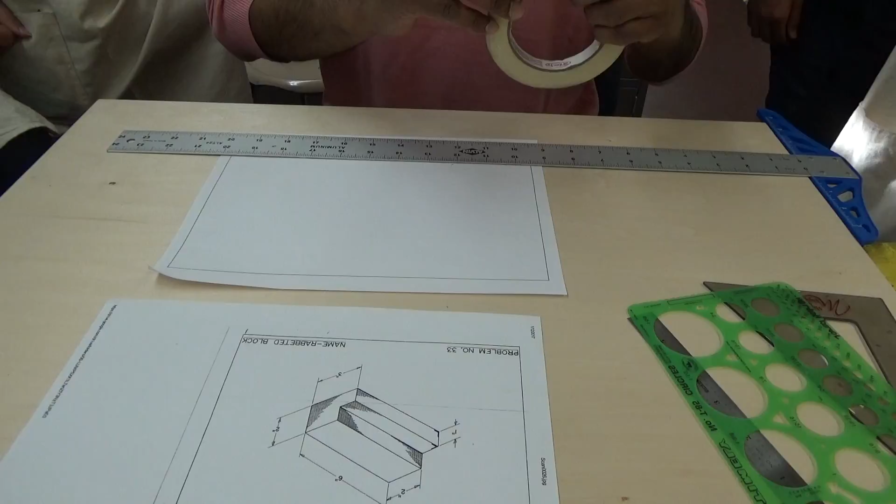Okay, so we're going to do an orthographic projection of this image right here. So we're going to do the top view, the left view, and the front view. So we're calling this the top view, we're calling this the left view, and we're calling this the front view.

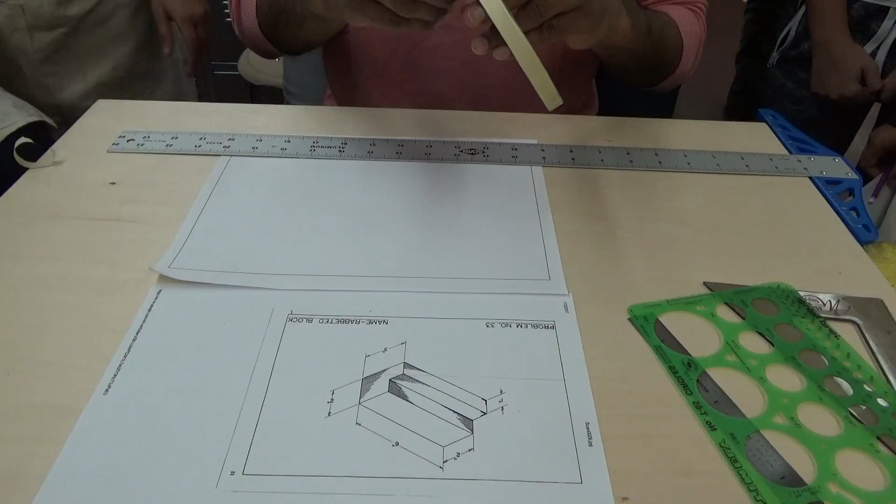So first thing I'm going to do is I'm going to square my drawing paper onto my drawing board. Get a couple pieces of tape. Okay. Break 4 pieces off. Okay, so I'm going to use my T-square to make my edge parallel. Clean off my working area.

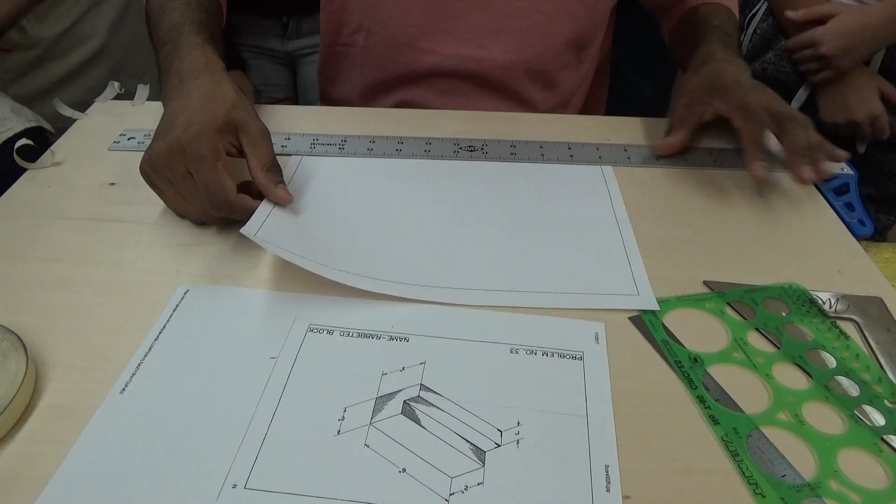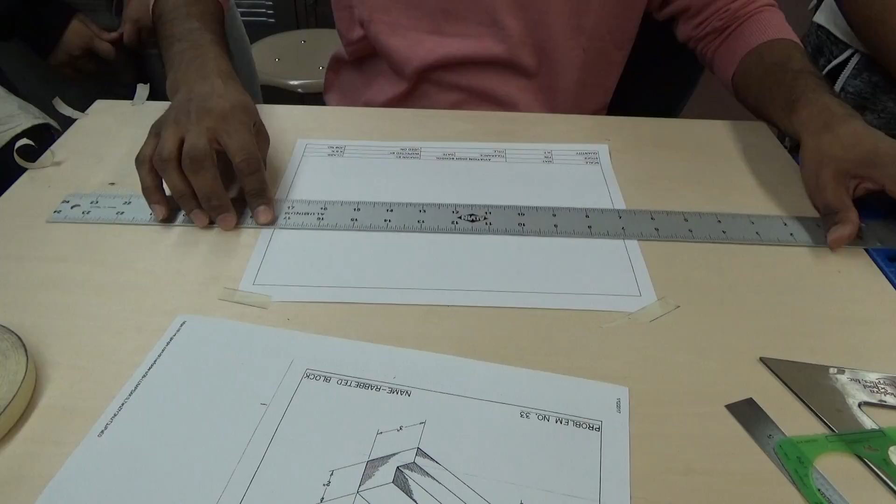Secure the top corners. Then I'm going to take my T-square and I'm going to remove all the air. And I'm going to double check and make sure that my line is still parallel with my T-square.

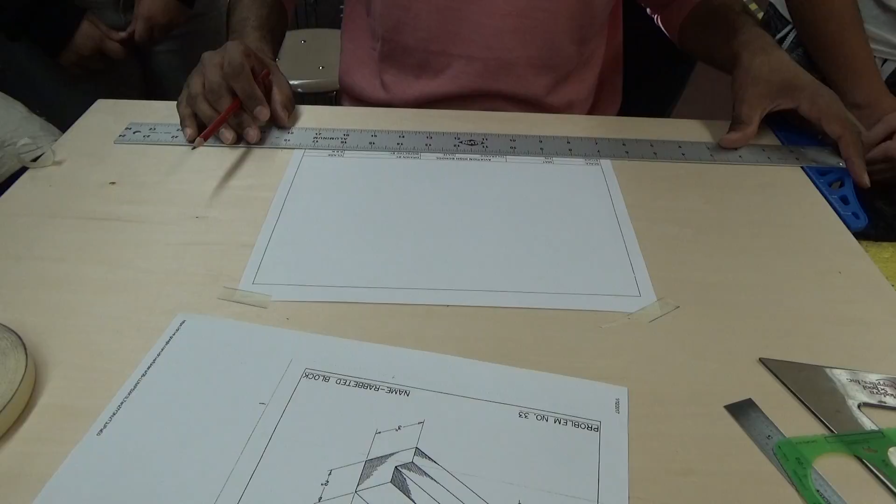Okay, good. Now, the first thing I'm going to do is I'm going to make my guidelines for my block lettering to fill in my title block. So at the bottom of my lettering, I'm going to make a nice light guideline. Notice how I keep my hands straight and I glide the pencil and I move my whole hand, not just my wrist. Whatever angle you start the pencil with, you keep that same angle across the entire line. And your block lettering will come out nice and even and the same thickness as the lettering on the paper, the printed lettering.

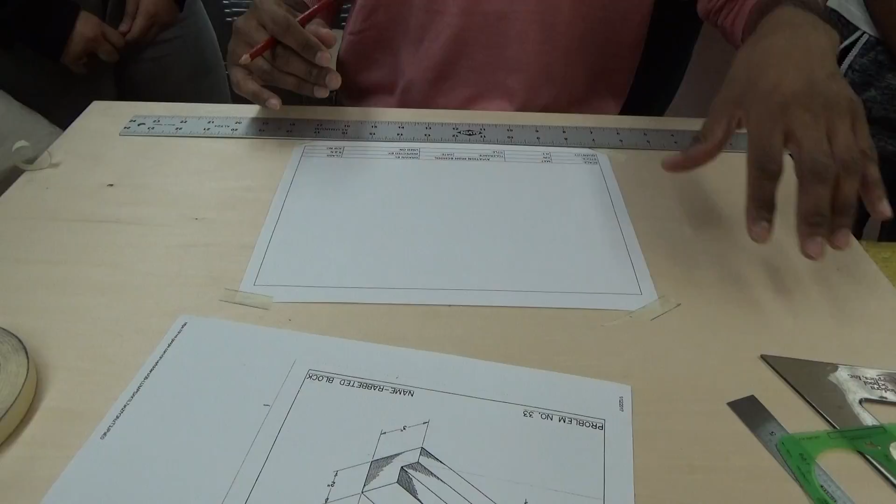Okay, so my lines for my title block are done, so I'm going to go ahead and start working on my image. So first thing is, where am I going to place my 3 images? So what I'm going to do is, my left view is going to go in this area, my front view in this area, and my top view in this area. So a little bit above, I'm going to make a horizontal guideline.

Okay. Now, I'm just going to pick a spot, and I know I need 6 inches and 3 inches, so I got to make sure that I have enough to do both of my images. So this is 3, and that's about 6. So I'm going to go right here, and I'm going to put a mark, and a mark.

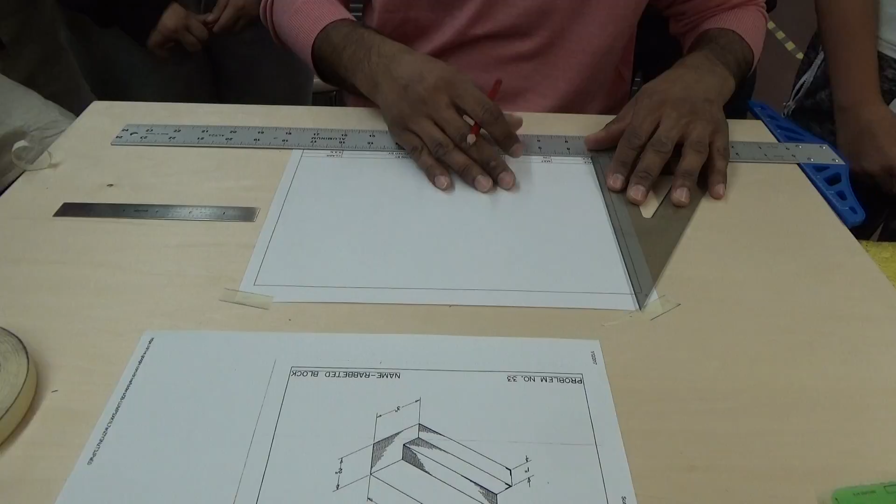Now, I'm going to make a vertical line across the entire paper. Okay, the reason I make lines across the entire paper is so that all my sides line up. So this is my vertical line. And notice how I keep the T-square, make sure it's flat against the edge. I use my hand. Okay.

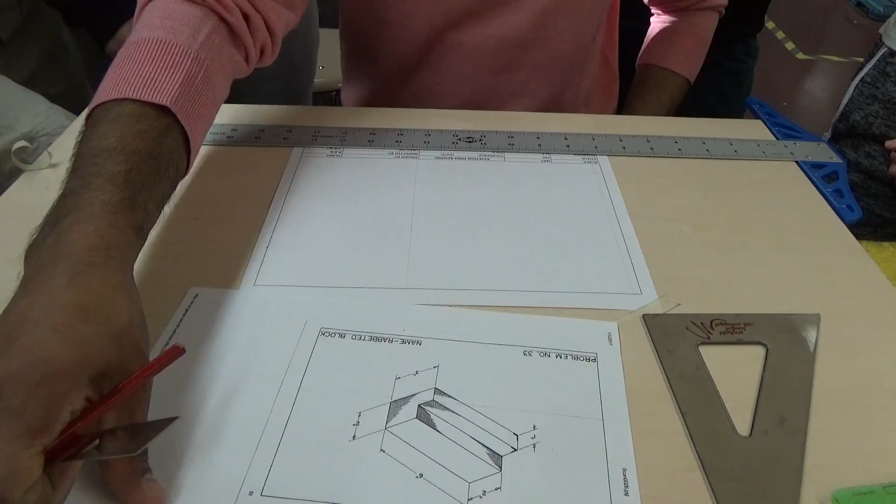Now, from here to here it's 1 inch, and from here to here is another inch, so I need a total of 2 inches. So I'm going to measure up 2 inches, and if you notice, my guidelines are going to make more than just one view. So I'm going to measure up 2 inches, I'm going to make a mark, and also I'm going to measure 1 inch and make a mark.

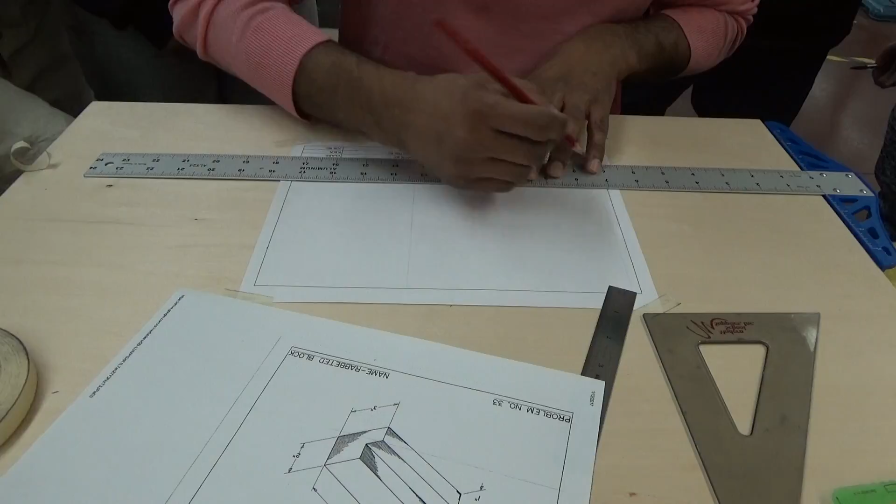Okay? Now I'm going to take that same inch mark, and I'm going to make a guideline across the entire paper. I'm going to go up another inch, I'm going to make a guideline across the entire paper. Okay? So now I've got my front view done. Now I have to go ahead and do my top view. Okay, so I'm going to leave a space.

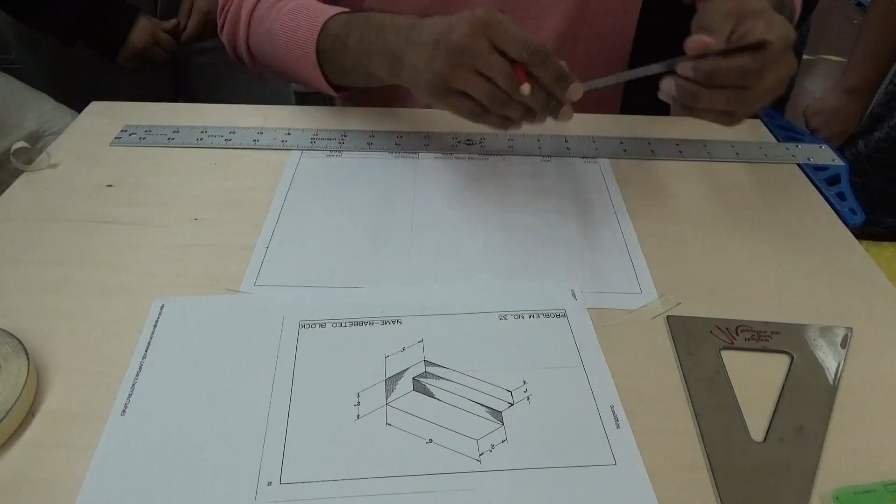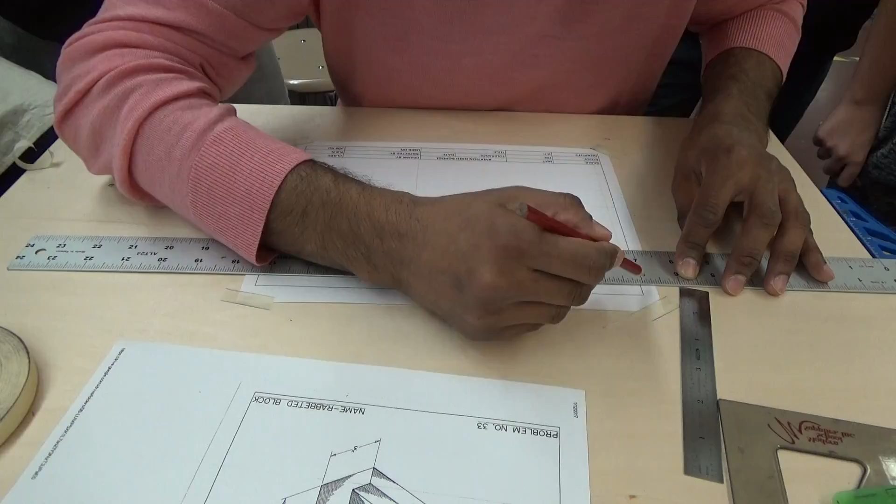Okay, now the top view is 2 inches and 1 inch, which is a total of 3 inches. So I'm going to take a look and see where about 3 inches fit. Okay, and I'm going to go ahead and mark in 1, 3, and then the 2 inch mark. Okay, and again, I'm going to make my lines across the entire paper because my guidelines are going to become my extension lines, and then I'm going to put my dimension lines in between them. Okay. Okay, so now we have 3 inches for our top view.

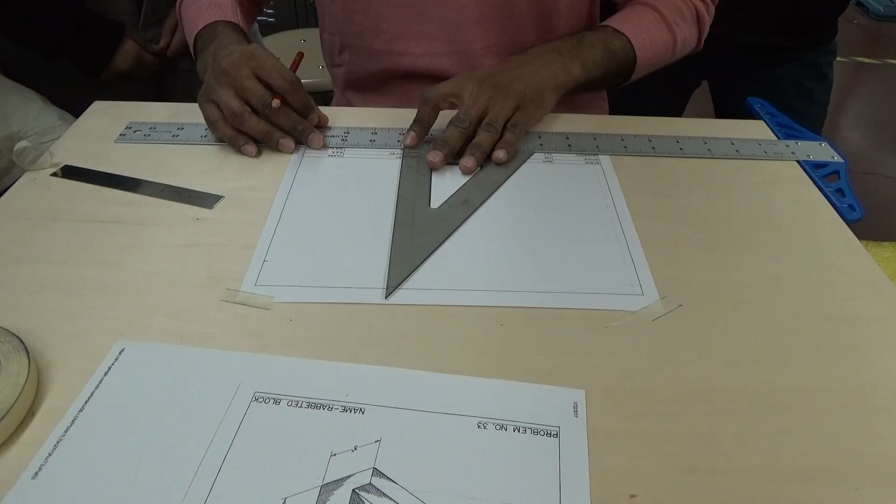Does anyone have a dark number 2 pencil I can borrow? A sharpened dark number 2 pencil? I need a sharpened number 2 pencil. Is it sharpened? Is it really sharpened? No, I need a point. I need like a really sharpened number 2 pencil. Anyone have a sharpened number 2 pencil? Can I borrow your mechanical pencil?

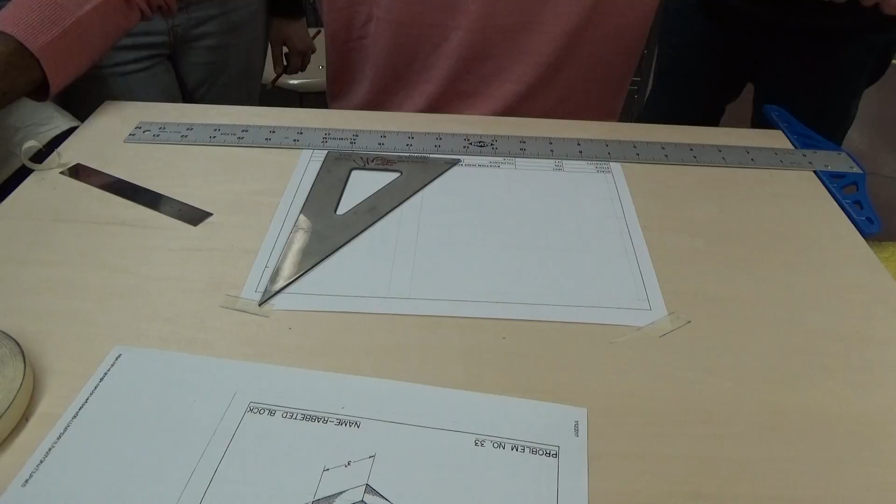Okay. Generally, I don't like to use mechanical pencils, but I'm going to do it in this case for expediency. Okay, the other thing is, I need 1 inch over here. One more vertical line.

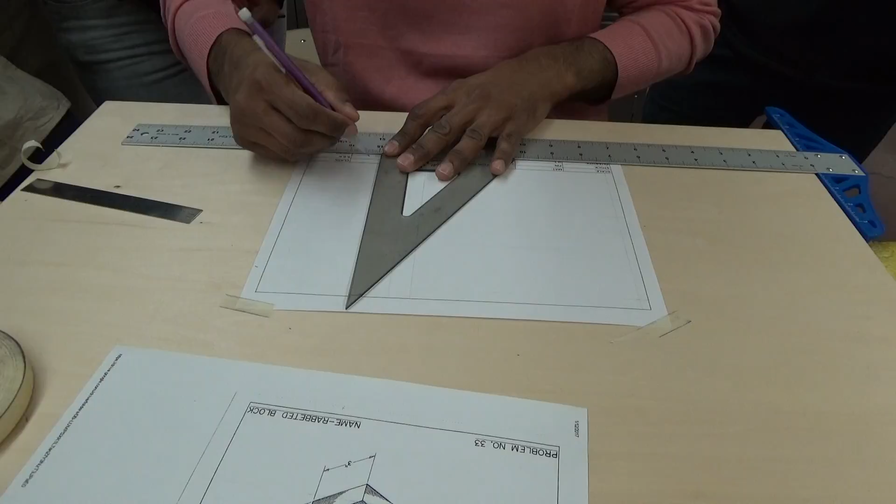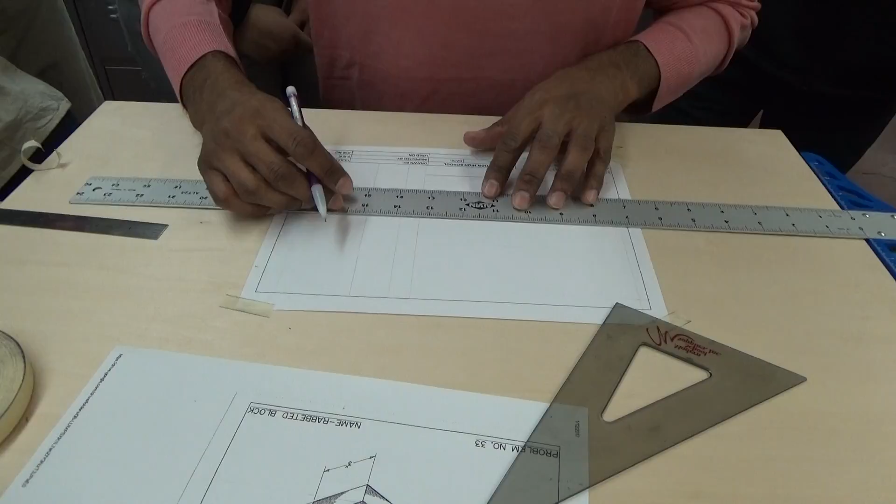Okay, now, what do we need? Let's start darkening our object lines, right? So we have our guidelines. Now we're just going to go ahead and darken in our object lines. 1, 2, notice all the time I'm making sure that my T-square is flat against my edge. Okay.

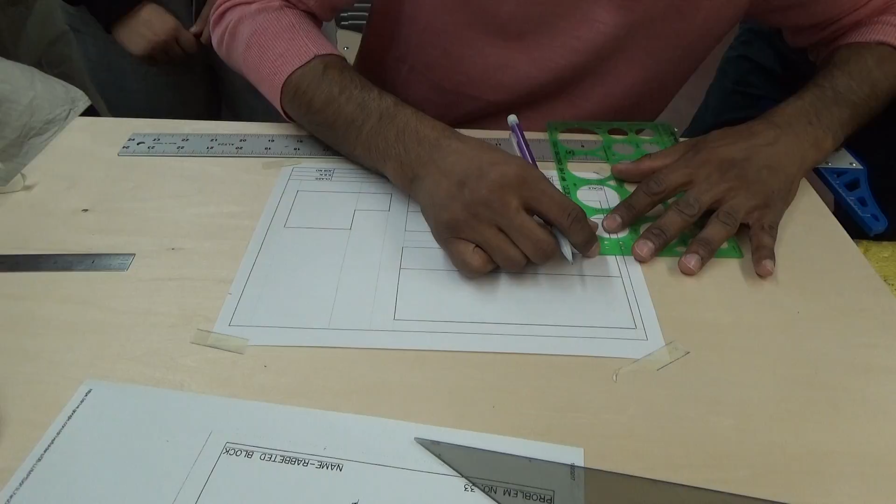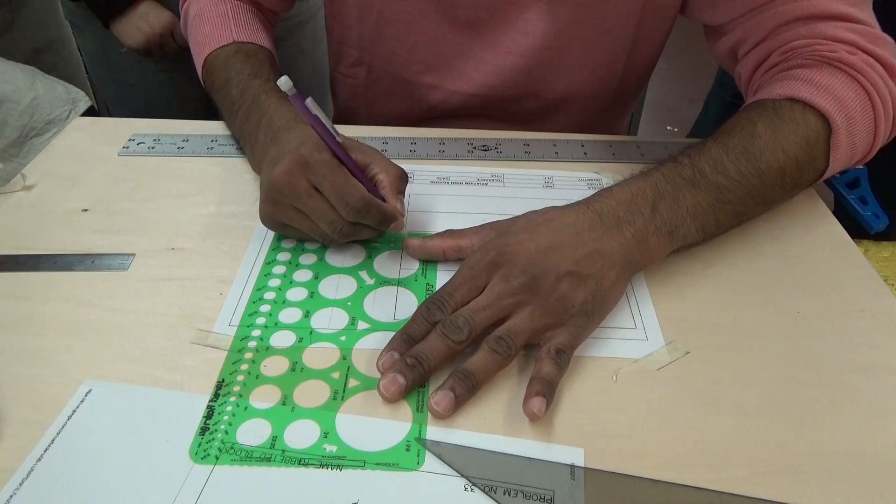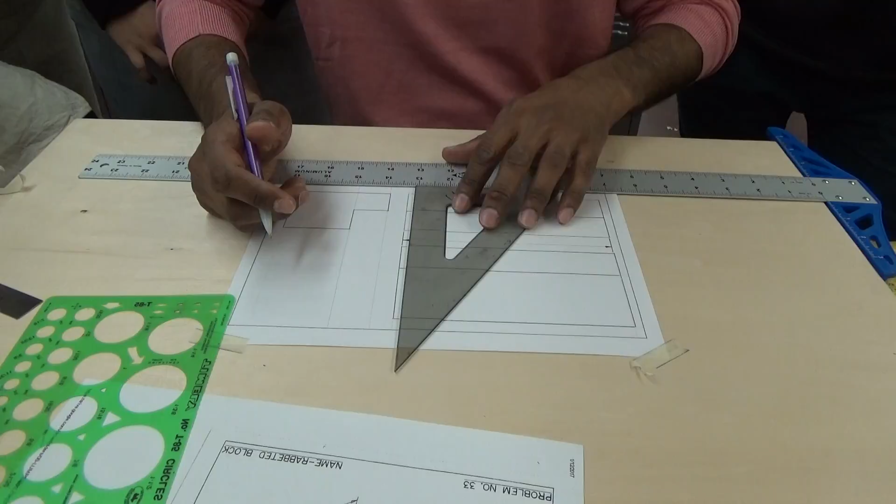Okay. I'm going to darken in my guideline a little bit, not too much. I'm going to keep it away from my object. Okay. So I know what my width is. Now on here, I'm going to go ahead and put in a few more dimensions. So let's see. Okay, we can do 3. We can make this here. Oh, I forgot to leave a space. So I'm just going to erase it. Take an eraser. Left a space.

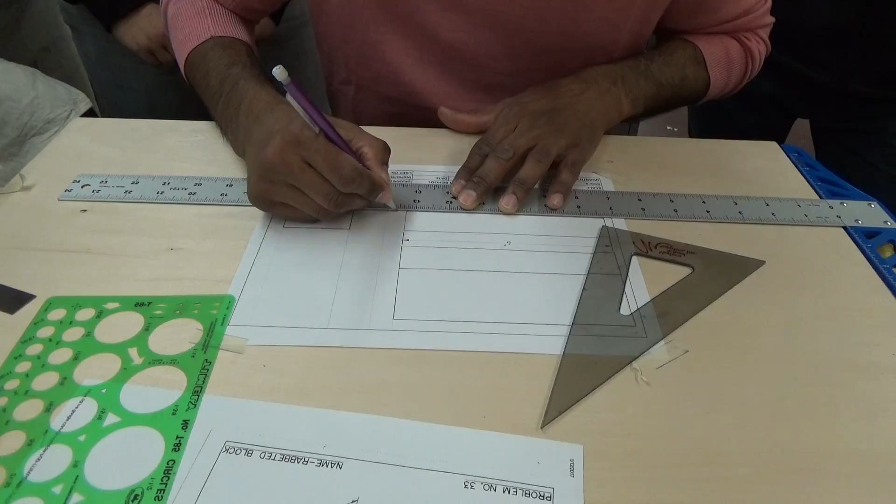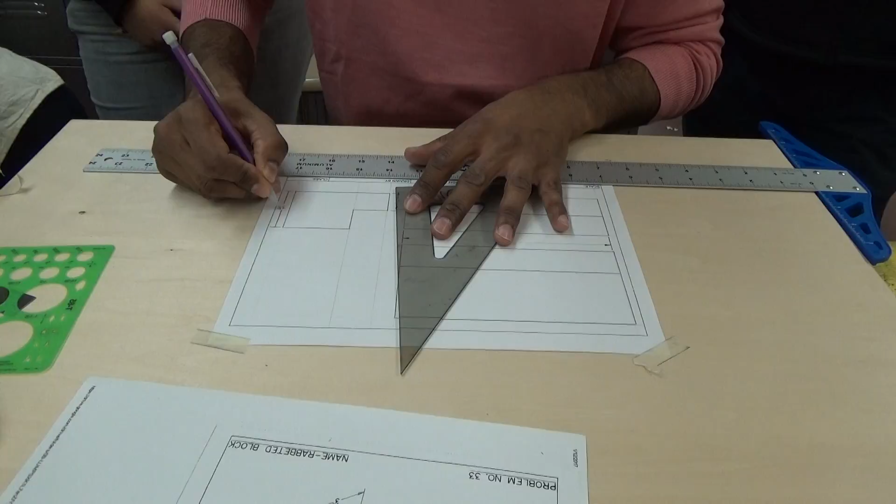This is 1 inch. Put in some extension lines. Take my template. Find my arrow that I'm using. The other one is 90 degrees. Both 90 degrees. Yeah. Both 90 degrees.

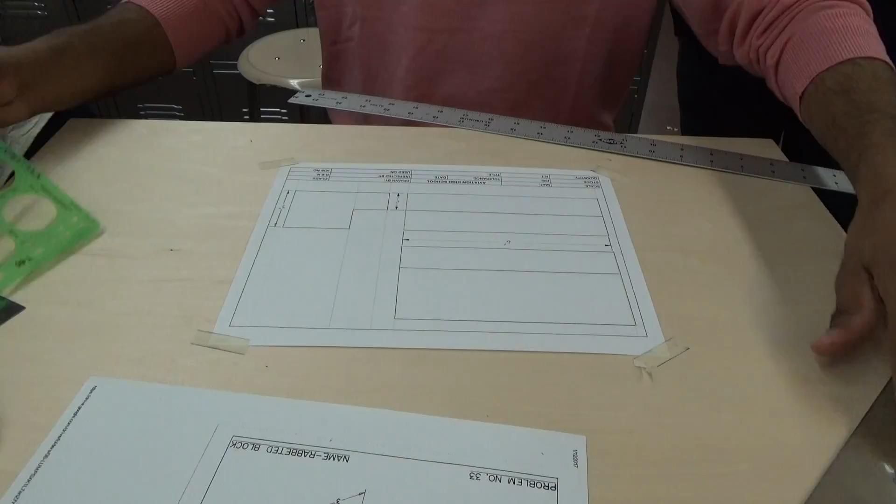2. This is not 3. Sorry, I made a mistake on my dimensions. This is 2 inches. Apologize. Here we go.

And here we go. And that's it. I fill in my title block. Fill in my date.